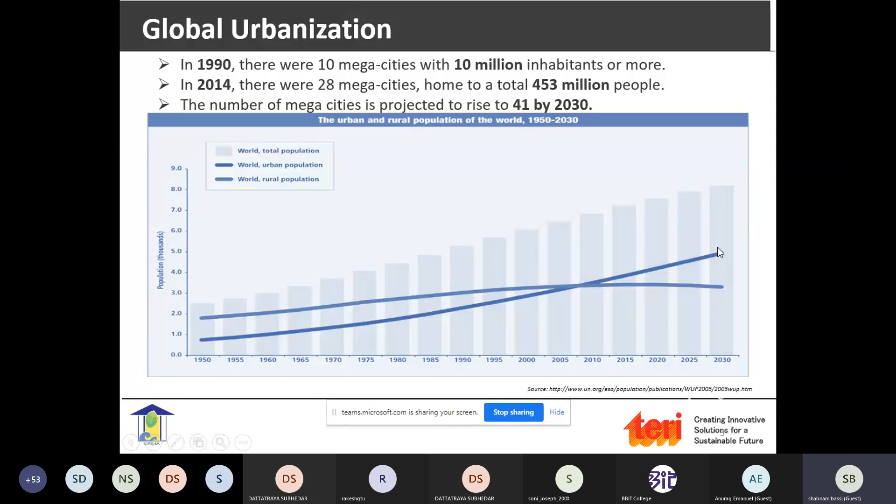More and more people are migrating to urban spaces, which indicates that since a lot of us are going to be migrating to urban spaces, we will need more housing. If it is going to be more housing, then there is going to be a lot of depletion of resources. Urban spaces will need more infrastructure, which will mean we need to know how to manage these resources in a better way.

So this is the population growth trend since 1950, and this is how we are growing exponentially.

There is a vision of the government of India, and there are various schemes, including the Smart City Mission, the Amrut Bharat, the Pradhan Mantri Awas Yojana, and the Swachh Bharat, which are all aligned to providing basic infrastructure, efficient urban spaces, and improved quality of life. In addition, they are creating lighthouses for replicable models which can be used in various cities of the country. So this is the vision in which the government is thinking, so that we can match the expectations of the upcoming urban spaces expected by the year 2050.

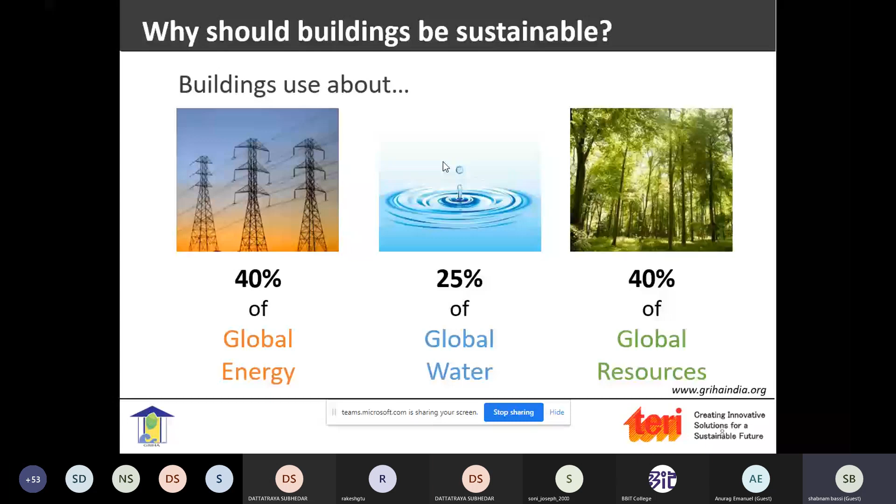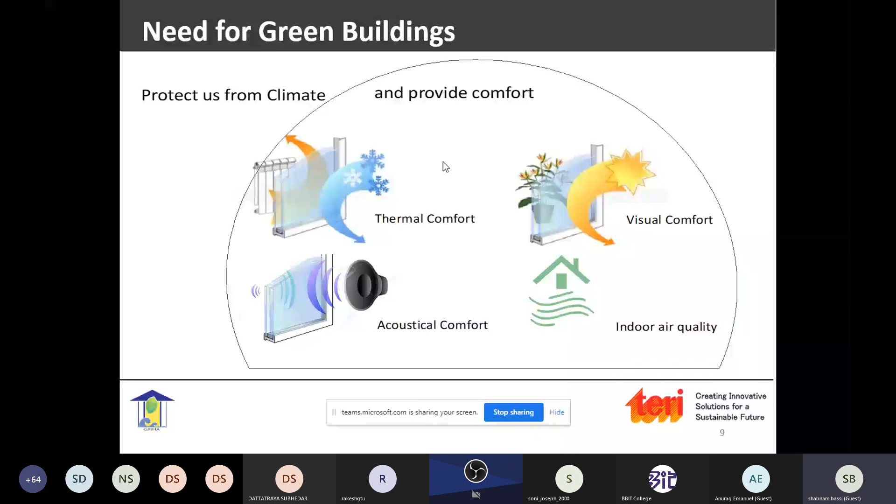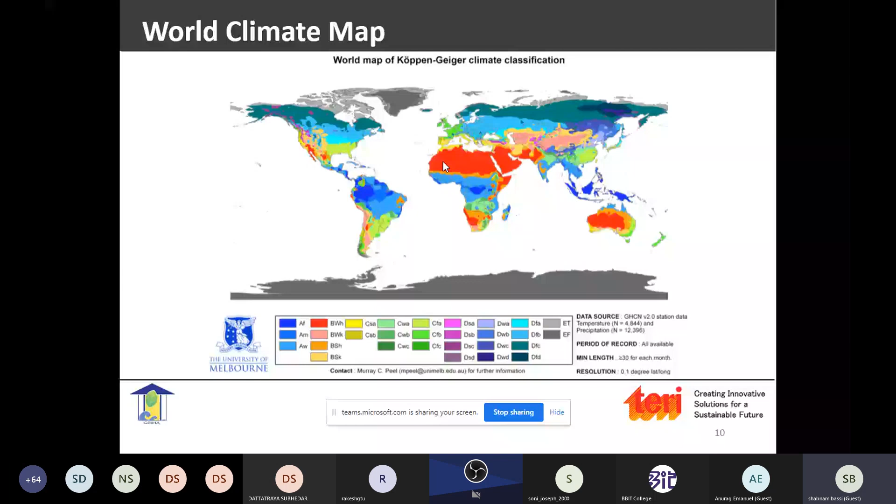I would have asked questions on this slide, but I have some limitations in terms of the interactions I can have with all of you. Just to give you a number, there are more than 28 climatic zones in the world, and each climate requires a different kind of construction, different ways in which buildings are constructed. Now, we all know that we fall under the tropical belt.

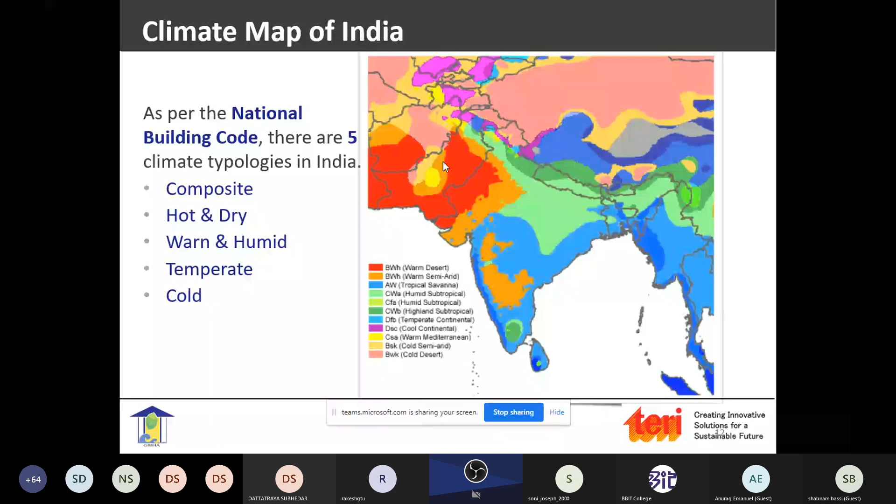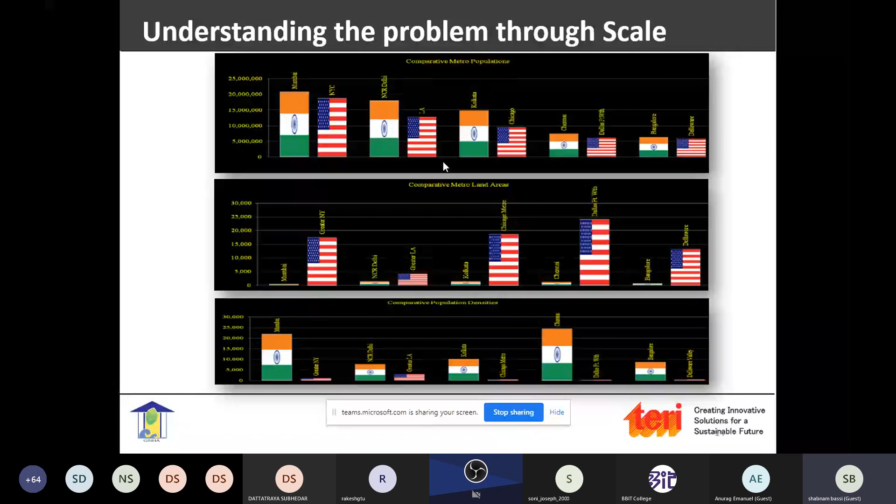So when we start comparing the kind of resources we have, the kind of land masses we have, it is not easy for us to compare ourselves with any part of the world, because we are quite limited in terms of the land space that is available to us. We don't have the luxury to construct buildings because the populations that we are looking at are quite large, and we have to design our projects in such a way that we are able to meet the requirements of all of us. So comparing ourselves is not acceptable, because that gives us a wrong image.

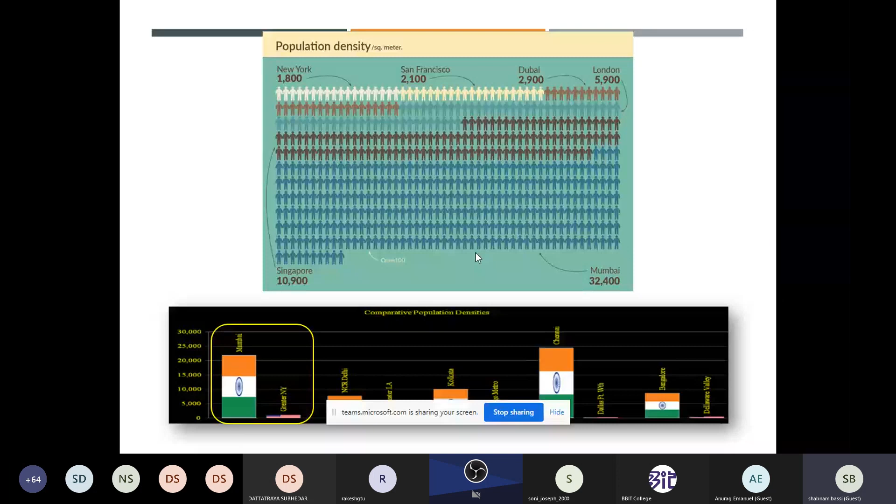Even in terms of variations in temperature, if we compare Mumbai to New York, the maximum temperature that we observe in Mumbai is 39.6. It also goes up to 42, 43 sometimes. Whereas New York is designed for -3, -2, and it reaches a maximum of 21, 20 degrees when there are peak heat gains. Similarly, Delhi compared to Los Angeles: the maximum temperatures in Delhi touch 50 degrees, 49 degrees a lot of times, and Los Angeles is not anywhere beyond 17 or 18 degrees.

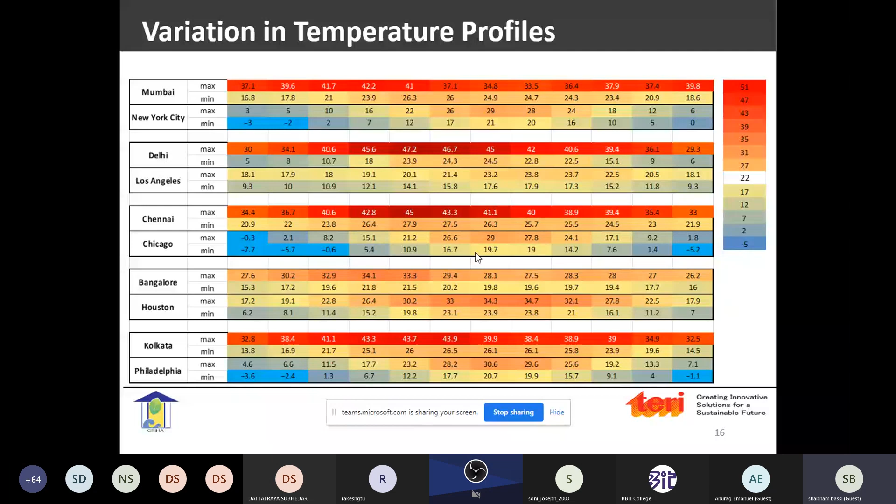So if I had asked you, you would have said that these buildings are not based in India, but in New York or some other place. But I would like to inform all of you that these buildings are based in India, and we have started aping buildings from the West. Now, when we talk about glass buildings, all the buildings that you see here, first of all, we don't know which city these buildings are designed for.

Secondly, the one major reason why we should not be designing such buildings is that we are using a lot of glass, and the basic property of glass is that it traps a lot of heat. Now, we just saw cities like Chicago or New York, where they have temperatures of -3, -4, or even -7 at some times of the year. Constructing a glass building in such cities makes sense, because when glass traps a lot of heat, it is able to keep that building warm for a lot of the day. So they don't require a lot of heating load, because their buildings will be thermally more comfortable with the trapped heat keeping them warmer.

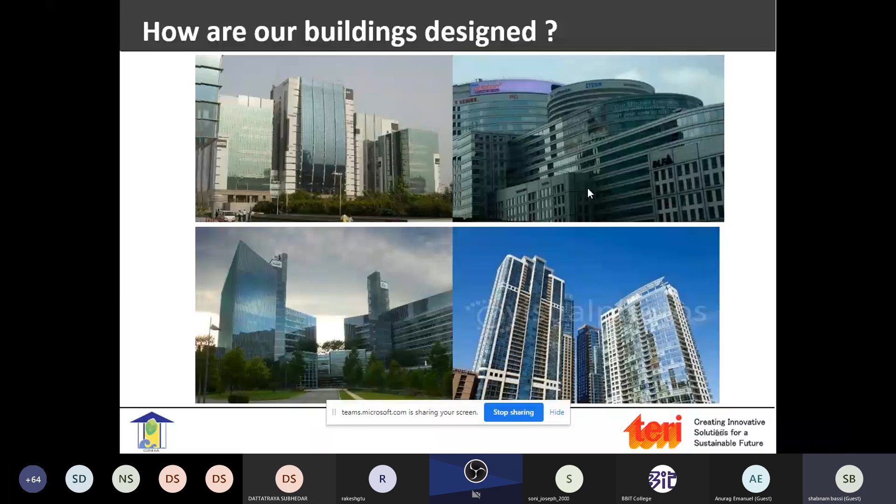So that is how the Energy Conservation Building Code came into being in the year 2007, when the Government of India, under the Ministry of Power, formulated these rules and regulations to ensure that the buildings of the future were designed keeping certain norms in mind and not just blindly copying designs from the West.

So, going a bit deeper into the design aspects or the climate conditions of the country, we all know that in the hot and dry climate condition of the country, we have high temperatures with low humidity and very less rainfall. It has intense solar radiation and generally clear sky, hot winds during the day and cold winds at night.

So I will not go into details of each climatic zone, but I'm just comparing this with another climatic zone, that is, let us compare it with a moderate temperature. Between a moderate temperature and a high temperature, the difference is that it will have moderate humidity and rainfall. The solar radiation will remain the same throughout the year, and the sky is generally clear. It will have high winds during summer, depending upon the topography.

But what we are trying to depict, by giving you a detail of the various climatic conditions of the country, is that the way we design a building for a hot and dry climatic zone will be very different from how we should design a building for warm and humid or composite or temperate. So it is very essential to know that if we are designing a building in the south, it will behave differently. Because the humidity levels are higher, maybe the air conditioning dependency will be more, or the kind of cooling required in a hot and dry condition will be water based cooling, and what we use in a humid climatic condition will not be water based cooling.

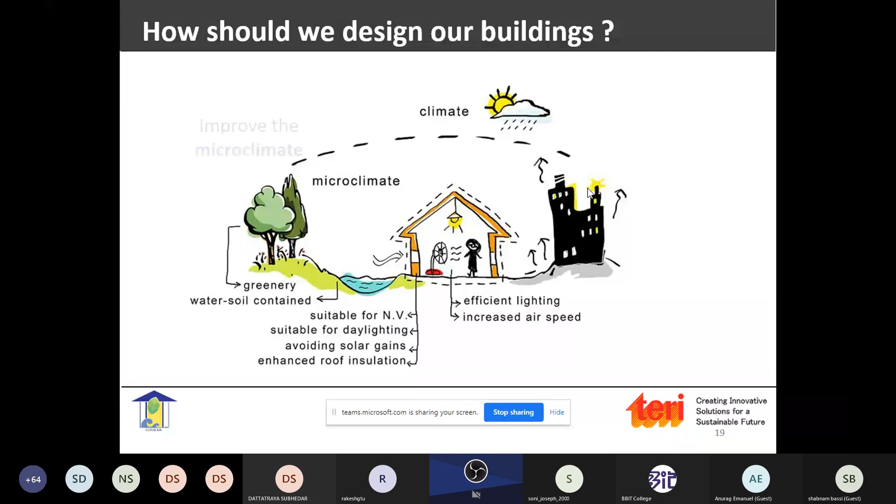Then we should design buildings in such a way that they're suitable for daylighting, avoiding solar gain, enhanced roof insulation, efficient lighting, increased airspeed. So these are the aspects that will help us improve the microclimate of that particular building. So basically, we'll have to minimize cooling and heating loads, improve the microclimate, and enhance the occupants' visual and thermal comfort.

Now, currently, the way we are designing buildings, we are giving very less importance to the design of a building, because people don't want to pay a lot of money to the designers, and they are spending a lot on marketing. So basically, this means that they are concentrating more on the aesthetics of the building.

Then, even in terms of constructions, it is observed that the kind of materials that are being used in a project are not of that quality, or do not have the sustainability aspects built into the materials. They are compromising on a lot of aspects in terms of materials, sustainability, and recyclability, and they want to construct a building at minimal cost.

So then what happens once the building is constructed? The repair works begin immediately after 4 or 5 years of occupancy of the project. So basically, your operations and maintenance costs go higher. Over the life of the project, we have seen in a lot of projects that the intention was to construct a building at a low cost, ensuring that we can save money on design and construction. But what we have observed is that money is basically not saved, but a lot of money gets wasted in the operations and maintenance of the projects.

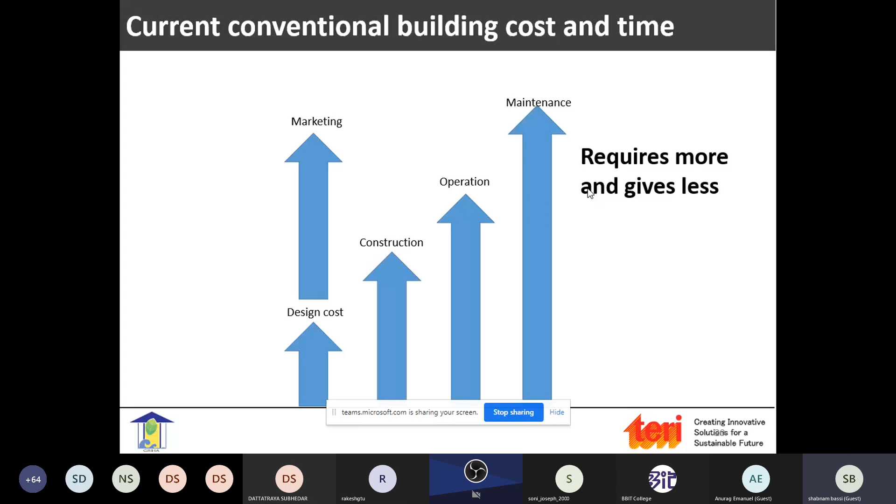On the contrary, if we are spending a good amount on designing a sustainable project which takes care of low impact and passive design features, in which we are also marketing it in such a way that people are aware of the green features of a project, and we are also aware of the kind of construction materials that go into constructing a green building, then what we have observed in our audits and surveys, with our own experience, is that the operation and maintenance costs are minimal.

So when we buy a project or occupy a commercial or a residential space, we as users should ensure that we are aware of all these aspects, and not only go by the first cost and think, oh, I'm getting it at a very cheap cost, so it is affordable to me. You should also try and understand how the design is, what kind of materials are being used in the building, and whether this building will give me the right kind of comforts that I'm expecting. You have to go into the details of the documents submitted by the builder or the person selling you the project, to understand what kind of efforts were made in designing that project.

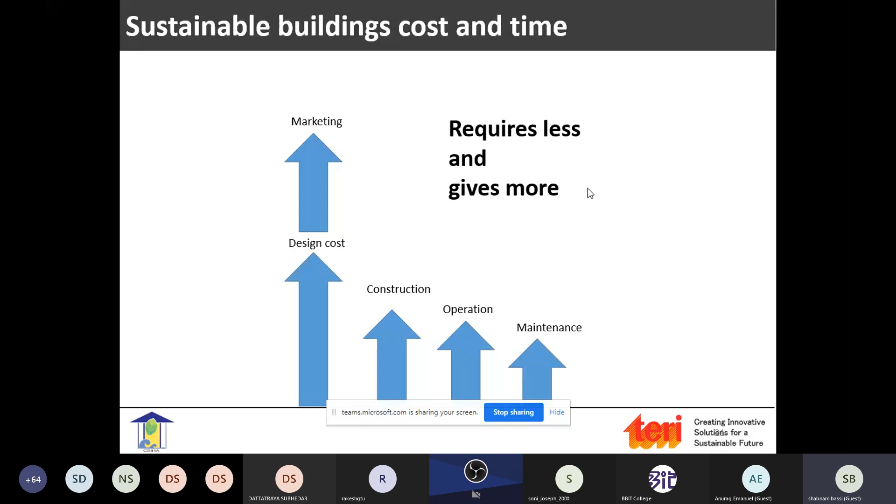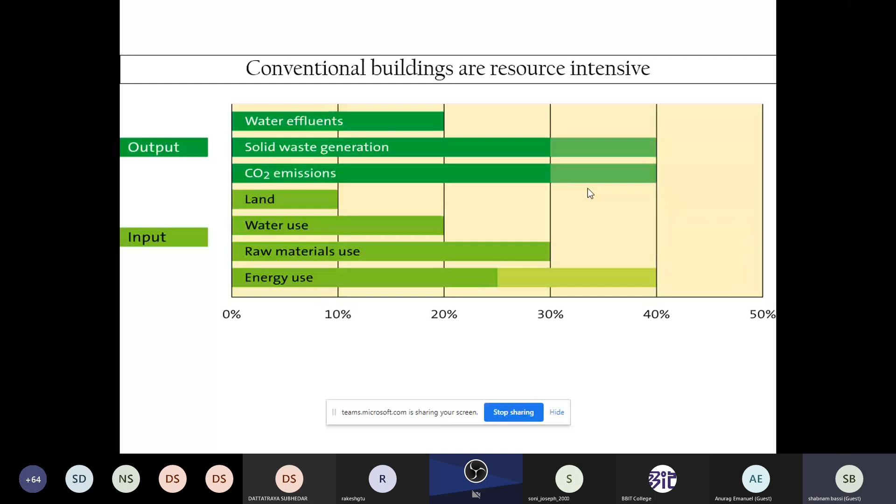So we have to understand how conventional buildings are designed, and why we are encouraging more people to go towards efficient houses or green buildings, because conventional buildings are resource intensive. In terms of land, water, raw materials, and energy, they use a very high percentage. The percentage graph is shown below. And in terms of emissions, the CO2 emissions are high, the solid waste generation is high, and the water effluents are very high. So in today's world, when resources are depleting at a very fast pace, there is no point in investing in conventional buildings.

So this is to give you, in a nutshell, the various features of a green building. An efficient or green building makes efficient use of energy, water, and other resources. They make extensive use of renewable energy such as solar. A green building has pollution and waste reduction measures, and enables the reuse and recycling of waste. A green building no doubt has very good indoor air quality. The materials used are non-toxic and sustainable in nature. The design of the building is such that the environmental conditions are taken care of.

Now, we have seen in a lot of projects, especially commercial projects, that when a developer buys a patch of land, he tries to clear the entire land and starts constructing on a fresh patch.

But what we as green experts promote is that we should try and do minimum destruction of the environment and try and preserve as many trees and greenery as we can, or in fact the natural resources, like if there are any water bodies, or the natural growing big trees that are there. If we can naturally preserve them, that is the best case to construct green buildings, because it is always healthy to be living as close as possible to the environment. So this is what we mean by a good design.

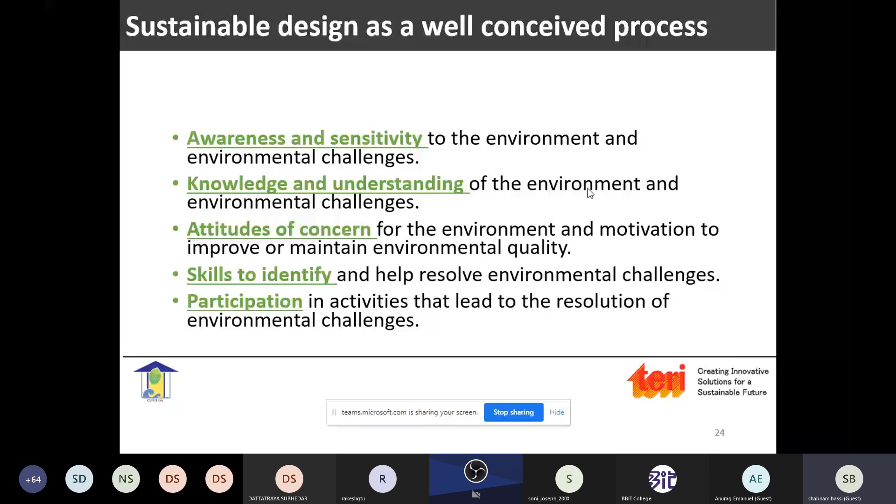If we have greater awareness and sensitivity, knowledge and understanding, attitude and concern, skills to identify, and we are participative and we lead from the front, and we are completely involved in a process, we will be able to do justice to the project. Use as little resources as we can, move away from the linear take, make and waste model, rather be on the circular path, and work on a circular economy, in which the concept of waste is eliminated, because every waste product is a raw material or a nutrient for another industry.

So we are always promoting this, that we cannot make a project and start dumping waste at a new site, because ultimately that new site will also be occupied by somebody else. So if we start using the same material within our project, it will not only be sustainable but will also be economically viable to all of us. Live off nature's interest, not its capital. Use nature's resources only at the rate they can self-regenerate.

So this is a very, very important aspect, that nature has given us a few things as a gift, and it is not something that we have inherited from somewhere. So it becomes our responsibility, and equally we are responsible for the kind of climate change events that are happening, be it floods, be it cyclones, be it landslides, all these aspects.

We as humans are completely responsible for it, and we should take the responsibility for it and ensure that such destructions, if not stopped, in future will harm us in a way that we will never be able to recover from. We should imbibe ideas of sustainable forestry, fishing and agriculture in such a way that we are giving something back to the society.

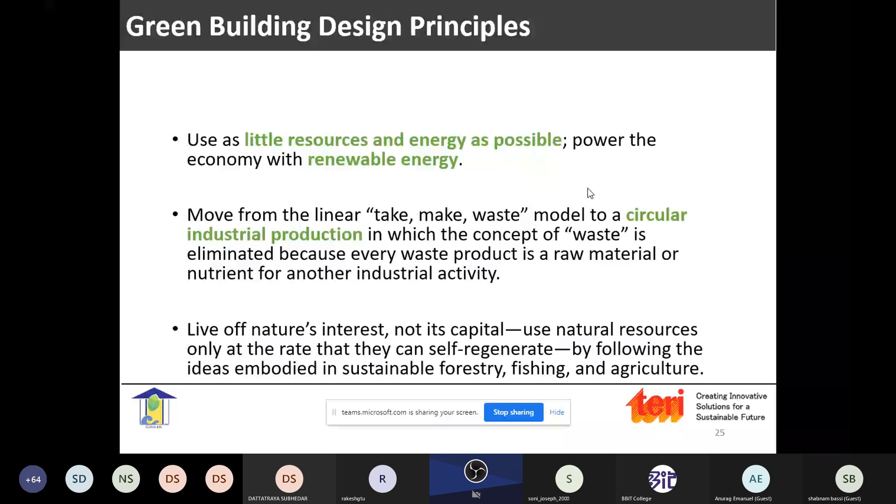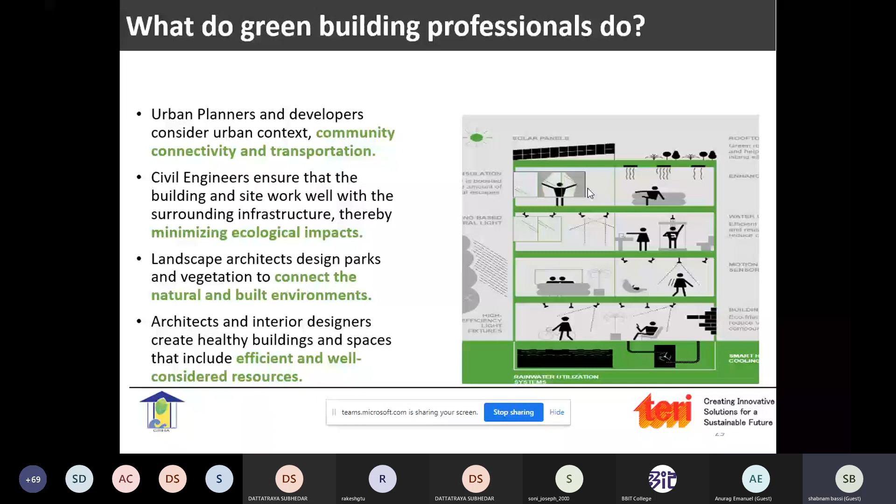So this is a very, very important aspect to understand in a building, that even if I do a good design, my design will fail if my civil engineer or the architect hasn't implemented it in the way I had designed it. So then my design has failed. If my facility manager has not maintained my building the way it was constructed, even then my design has failed.

So when we construct a green building, or when we are understanding the various concepts of green building, it is important that all of them understand the importance of constructing a green building, and then they work together. So this word that I'm using, that we have to work together, or work in a way that it enhances the other professionals' work, is the important link between success and failure, because a good design is successful only when it is implemented with the right honesty in the project.

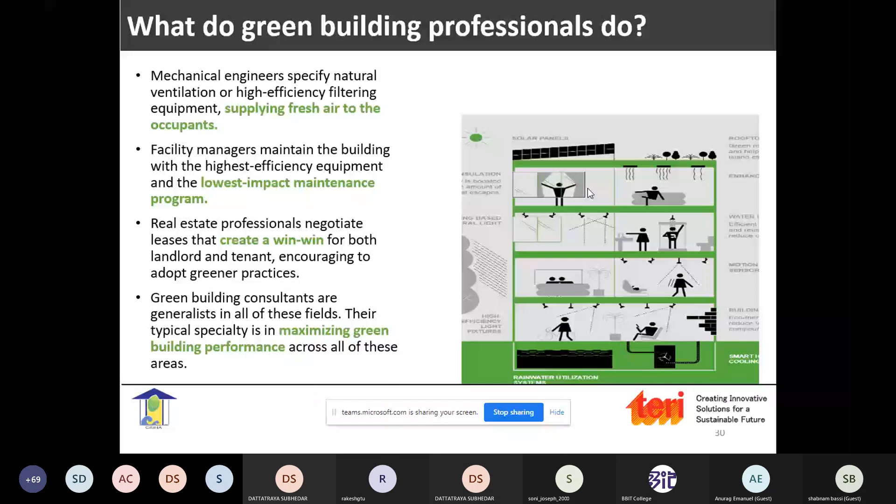So each state, the buildings are governed at the state level. So each state has its own policy to govern the buildings that they want to. So different cities will have different policies. So a policy that may be existing in Haryana may be very different from the way it is implemented in Maharashtra. And vice versa, policies that are in Uttar Pradesh will be very different from what is there in Bangalore. So each state has its way of judging what will work in their state, and they take out certain regulations and give benefits to the end user.

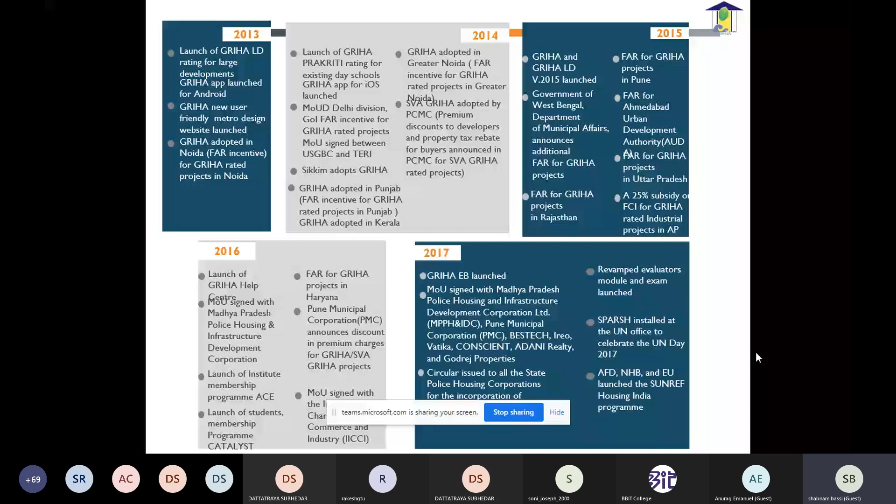And the list continues. What we're trying to explain is that the list is indefinite, but the intention is to have more and more people engaged in this journey, so that we have more projects coming up in future.

As a contribution to the ratings, we are supposed to report emissions on a global scale. Under the Intended Nationally Determined Contributions, India has recognized only GRIHA as the rating which will report its emissions through ratings.

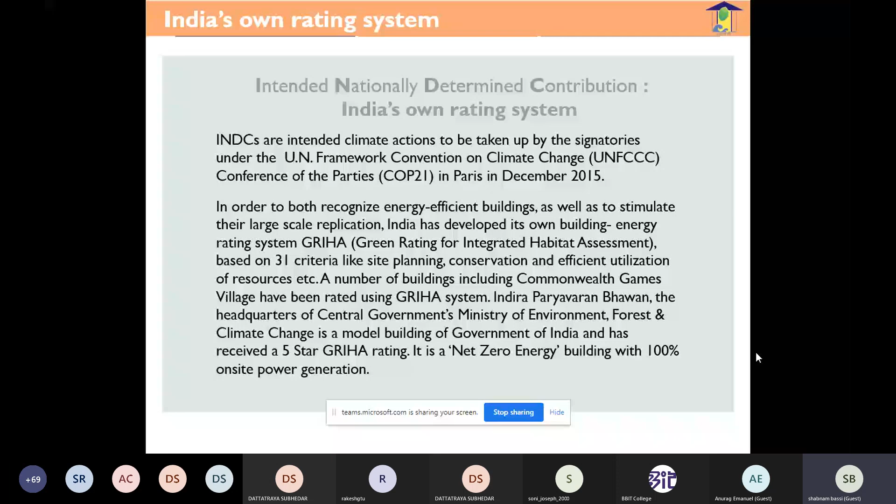So these are all the kinds of ratings we have. For built-up areas greater than 2500 square meters, we have GRIHA. For smaller categories, we have SVAGRIHA. For very large projects, we have the LD ratings. Then we have the affordable housing category, based on PMAY guidelines. We also have a city level rating, which is a handbook to understand how cities should perform in terms of sustainability.

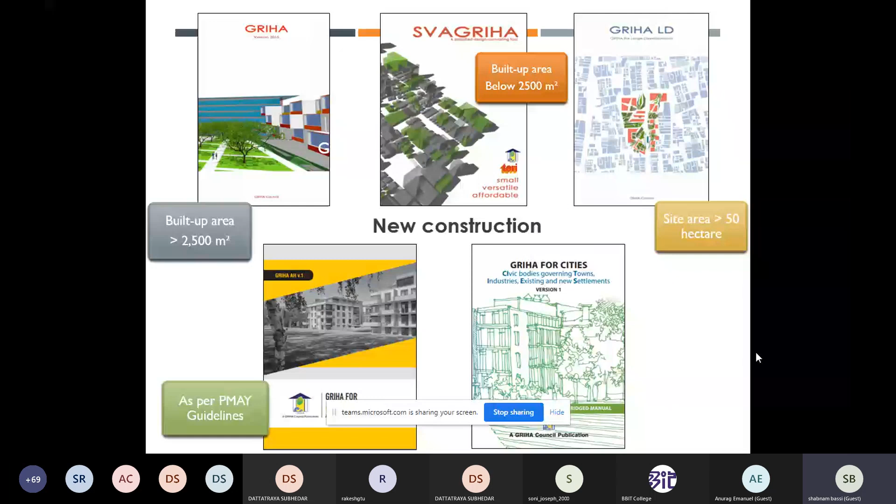We have a very innovative existing buildings category of ratings for school children, where we teach them how to calculate emissions for their own school. They do small calculations of energy, emissions, and carbon footprint, and any student aged 12 to 14 can do these simple calculations. This is the best age to teach children sustainability concepts, because this is what they carry home and into their lives. And since they do it themselves, it makes it more acceptable.

The key features of what we do is it's a context-based rating system. There are a lot of non-applicability clauses for places where certain things don't make sense, like if water tables are already higher in certain places, we don't encourage you to store water through rainwater harvesting.

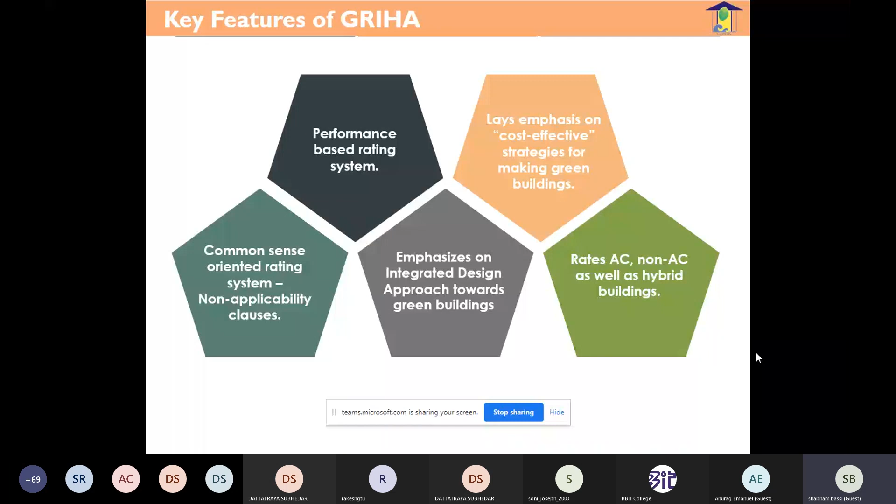Similarly, it's a performance-based rating system. We have so many experts working to construct a green building, so there's a lot of emphasis on an integrated design approach, where all the experts need to come together and understand the aspects in totality. It rates air conditioned, non-air conditioned, as well as hybrid projects, and lays emphasis on cost-effective strategies and use of local materials.

These are all the sections listed in our rating: site planning, construction management, energy, comfort, well-being, solid waste management, sustainable materials, socioeconomic strategies, etc. Point-wise weightages are listed here. Most of the weightage goes to water and energy, 20% to energy and 17% to water. It's a 100-point weightage system, where maximum points are given to energy and water.

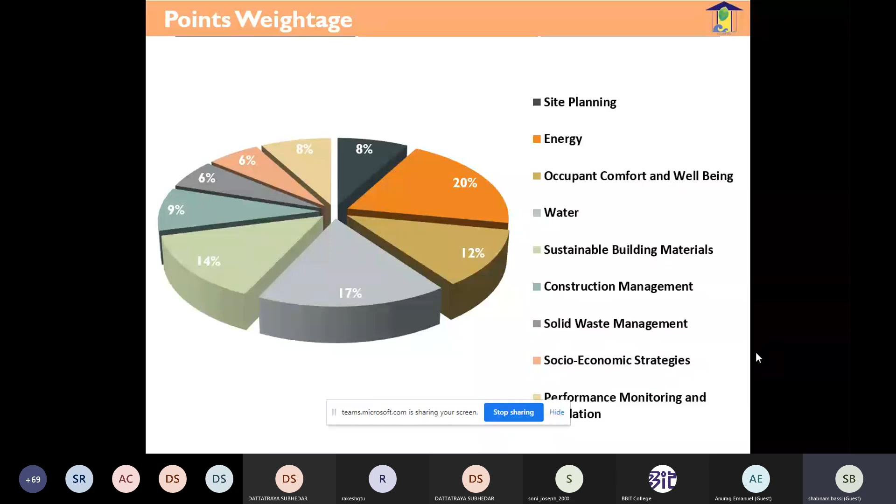The rating process is quite simple. Once you register a project with us, we immediately conduct an orientation workshop. This workshop is extremely important because we as GRIHA members go on your site and conduct it, not only teaching but making you aware. It includes your structural engineers, civil engineers, mechanical engineers, architects, designers, and interior people. They all must be present to ensure they understand the process in totality and work in their own zones to reach that common goal.

Then we conduct a lot of site visits. The first is done before the start of the project to ensure all construction practices are in place. Then we check that building compliances are met when installations are happening. After documents are submitted, a final site visit checks if systems and equipment are installed properly. Then it's assessed by a third party to ensure complete transparency in our process.

Then we get a final provisional rating. The final rating of the project is awarded only once the project is one year operational, to see if it's also performing the way it committed. These are the various point-wise weightages - you get a 1-star rating if you score between 25 to 40 points, and if you get more than 86 points, you get a 5-star.

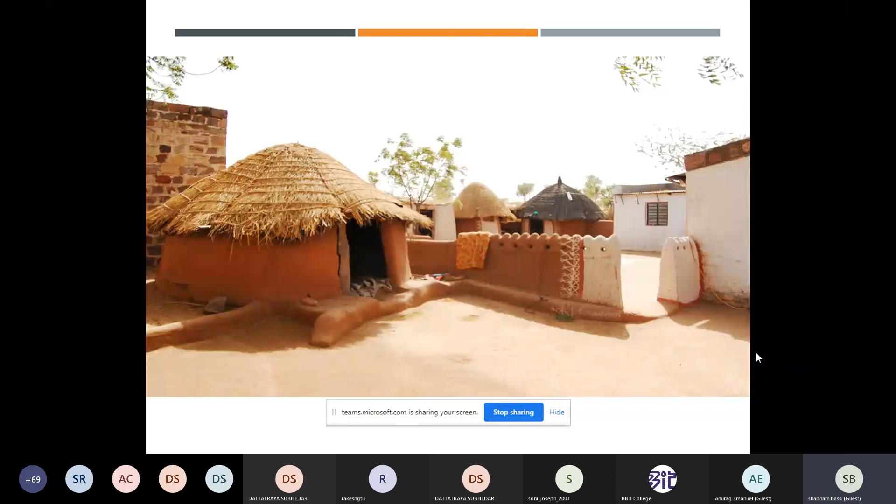So why do we need to talk about green? These were the kind of buildings we were constructing. I would like to answer on your behalf that if such a building was constructed in a hot and dry area, mud would have the basic property of keeping the building cooler from inside, and the thatched roof would also help keep the building cooler.

The style of architecture of Rajasthan is very different from the way a building may have come up in the South, or in any other part of the country.

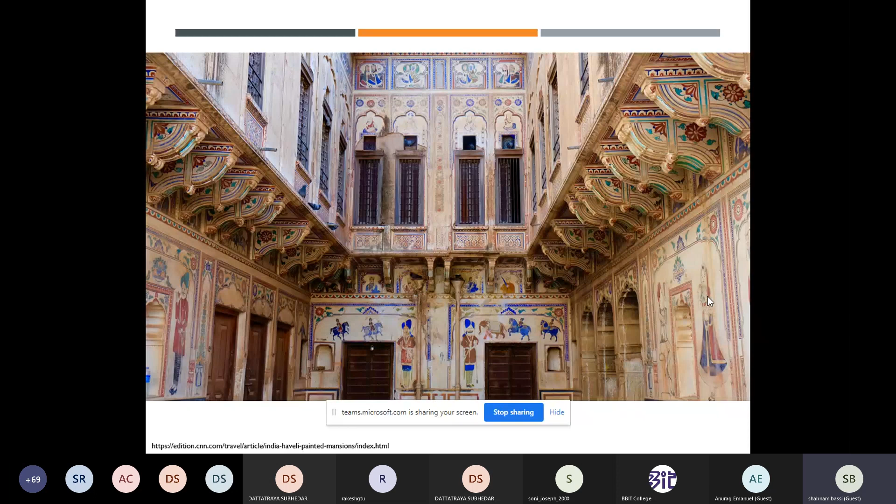There's urgent action required, definitely, for green buildings. If we start taking these concepts seriously, we will have minimal impact on the site and surroundings. We don't need to damage the surroundings just by constructing one project.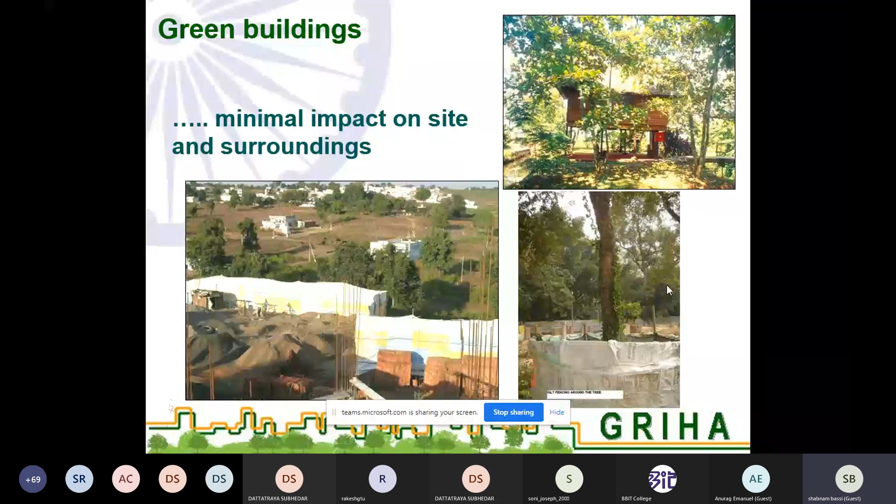By constructing green buildings, we become energy efficient and maximize use of renewable energy. Green buildings basically use less water, recycle water, and reuse water. Water is depleting at a very fast pace, and we need to become really serious about it.

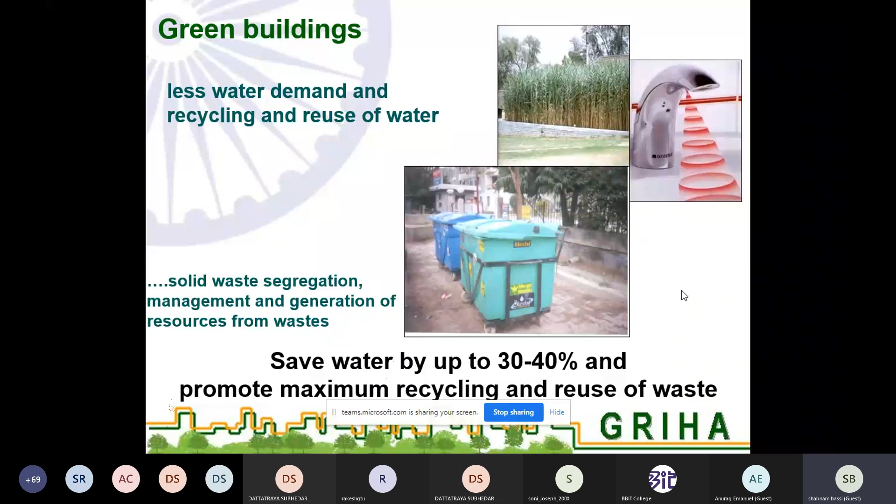Waste is becoming another matter of concern. Solid waste segregation is happening in a lot of places, but eventually it is going and getting dumped at one place. There is no point in segregation if we are not using it for the purpose it is intended. We need to ensure that end-to-end waste management happens the way it is intended. We save nearly 30 to 40% of water if we are able to recycle and reuse it.

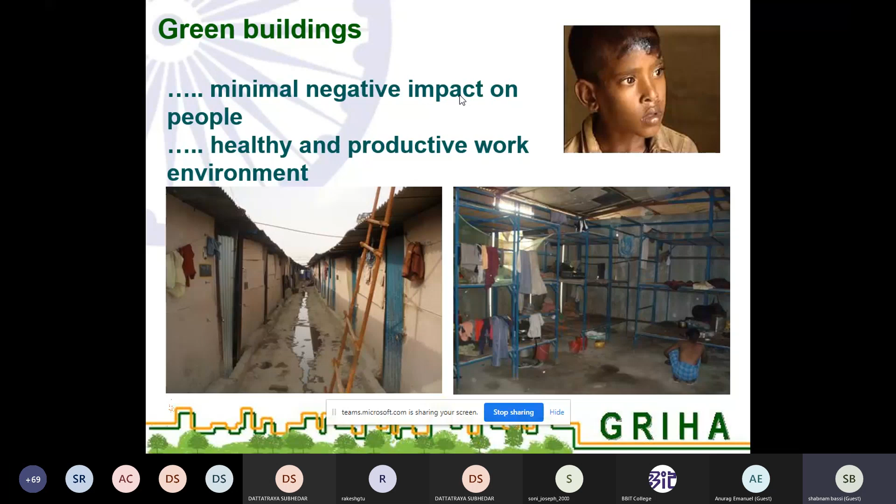General well-being - we never bother about the well-being of construction workers and the productivity of people on site. GRIHA is the only rating which has built in the social aspects of well-being of health workers. It basically has minimal impact on the people's health and productivity in the working environment. Green building design calls for an integrated and coordinated design approach in planning, design, construction and management.

There is a difference between an energy efficient building and a green building. An energy efficient building will only conserve energy, but a green building will conserve energy, water, landscape, waste generation, adoption of recycled and reused material, as well as use of low energy materials.

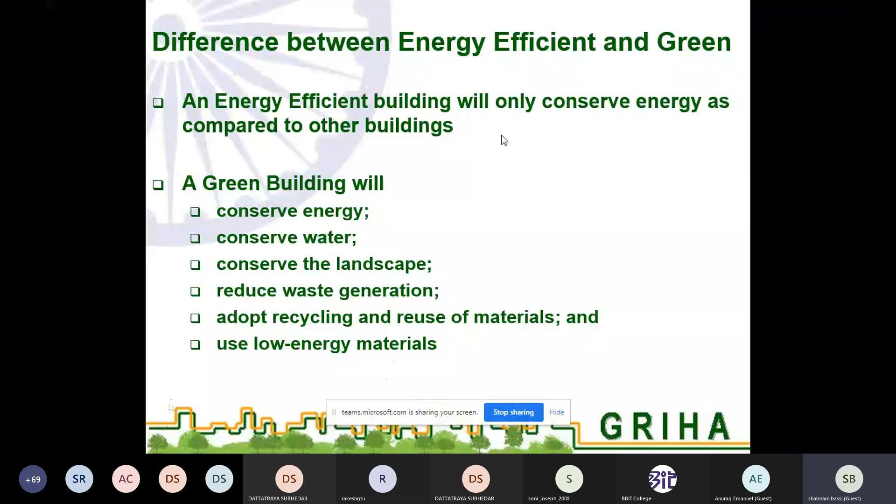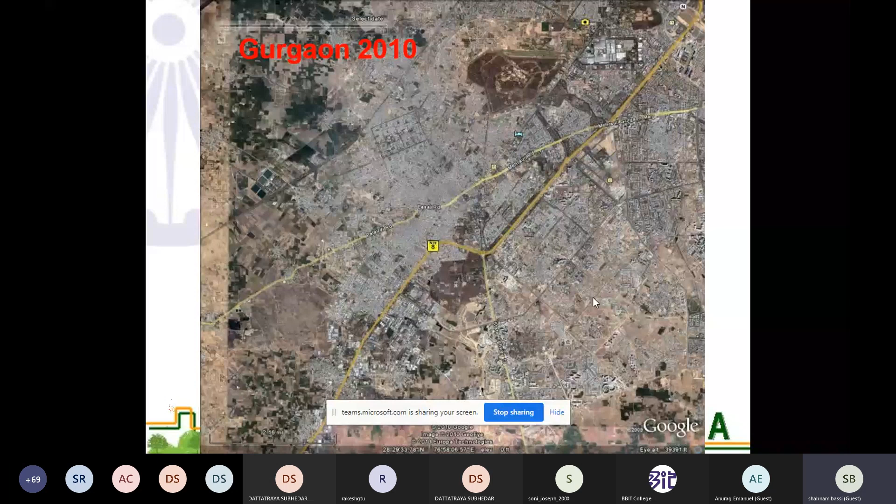Why do we need green buildings? This is quite indicative - in 2010 this much land was green, but now the entire patch has become like a concrete jungle. As we expand in urban spaces, there are hardly any green spaces left, and if we don't use these resources judiciously, this scenario will become common everywhere, with forest and agricultural land being wiped out.

Water and waste are prevailing urban challenges. Water availability is decreasing by 15% per capita by 2020. Only 26% of estimated domestic wastewater is getting treated, and nearly 42 million metric tons of solid waste is generated every day in urban spaces. This is the kind of waste and water we are using, and this is what we are left with.

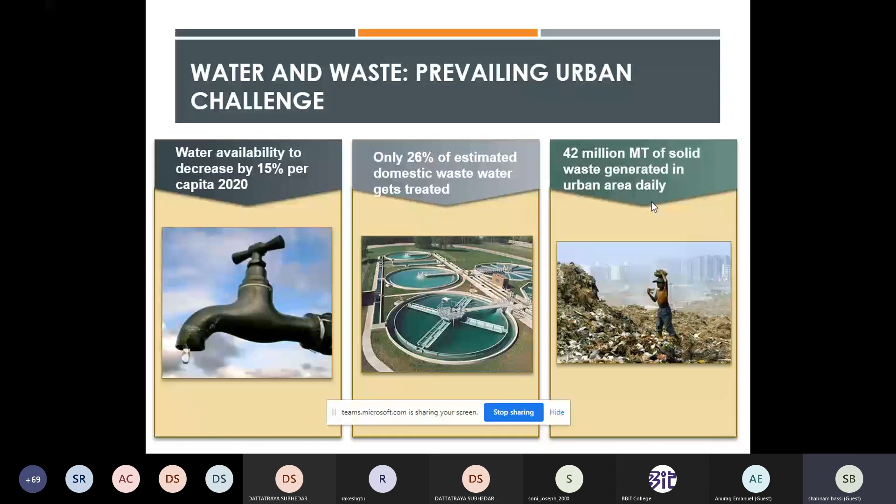We have certain rules or regulations already in place. I've already mentioned ECBC. The National Building Code 2016, Volume 2, has added a chapter on sustainability.

What is required in a rating? Mandatory. It is important to comply with all the aspects of the building codes that I just mentioned about ECBC. So that is, of course, the minimum benchmark that you all have to perform in order to get a rating. So going beyond the minimum benchmarks is something that ratings are promoting, that we have to do something beyond the already laid benchmarks of ECBC.

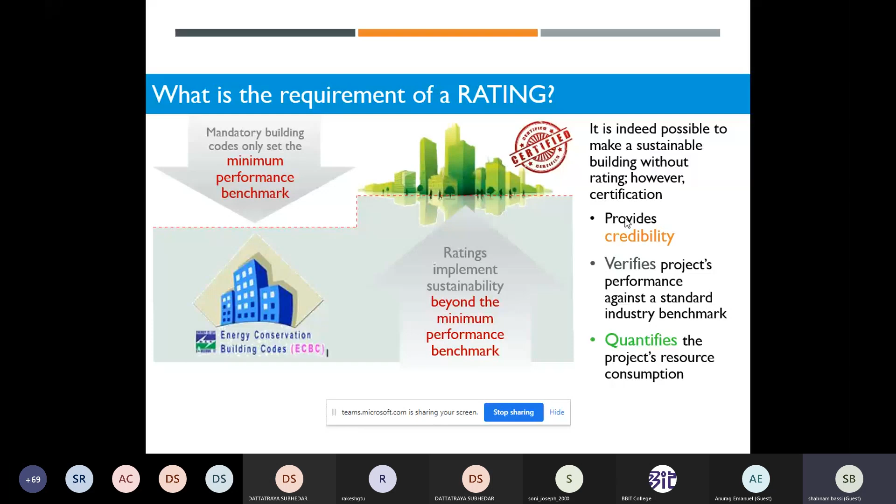It is possible to make a sustainable building without rating, but what a rating body does is that if I construct a building for myself and I say I'm satisfied, I made a green building, then there is no claim to fame. So basically we come in as a rating body. We not only rate your project, we provide you credibility, we verify your project, and in quantifiable terms we tell you how much resources you have used. So you have an authentic source of getting information from us.

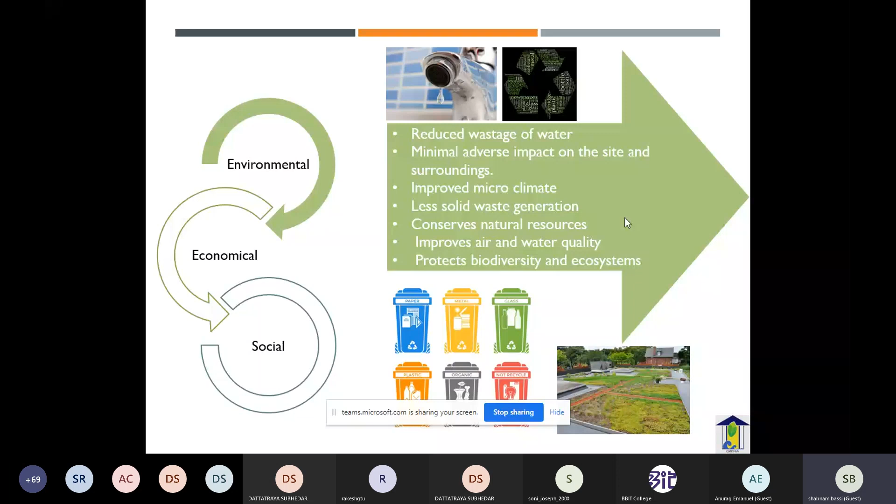So green buildings are basically environmentally responsible and resource efficient projects. This is, in a nutshell, a definition of a green project. Reduce waste of water, minimal adverse effect on site, improve microclimate, less solid waste generation, conserve natural resources. So all these aspects are part of the environmental, economical, and social benefits that I just explained.

Reduced operation cost, improved occupant productivity, create market for green products, less energy bills, improve quality of life, minimum strain on local infrastructure, because if you are reusing water inside and if you are able to harvest your own energy, then you will have minimal loading on the local infrastructure, and this will indirectly also improve your health and comfort.

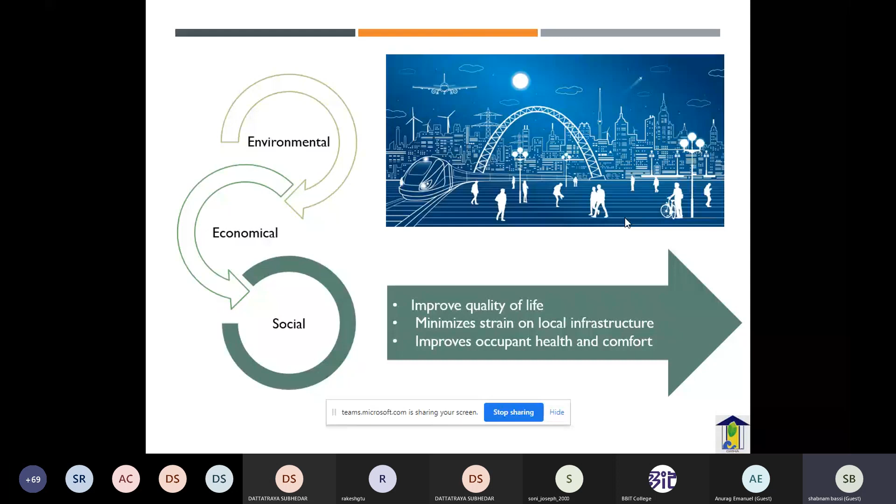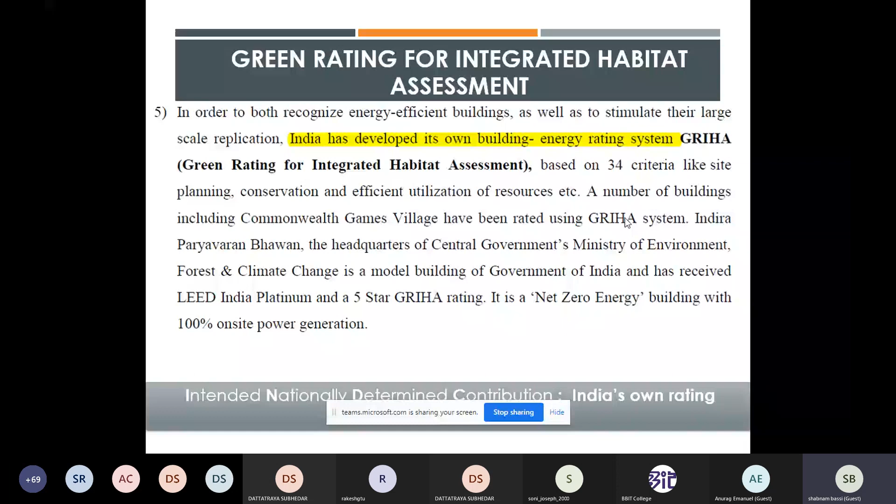Now we all are living with this myth that green buildings cost more. But what I would like to emphasize is that if you are able to reduce the energy demand of your building by designing a good building, so basically your architects will play a very important role in designing a project, then that will reduce the demand for energy by using passive features. And there are a lot of passive features that can be incorporated, like light shelves, or using the natural bodies, using your trees around you. These are all the passive features that can be taken care of when we are designing a green building. Then your building is least cost impact. It will not have any impact on the cost of the building.

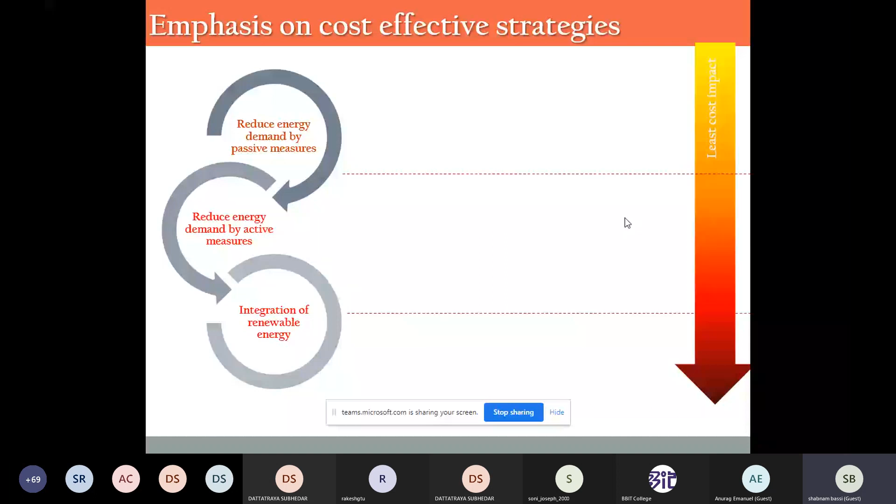That's what I just said, that it has to be climate responsive, energy efficient envelope, daylight harvesting, integration of natural resources for cooling and heating of a building. So basically, the way you are putting up your windows, if there is enough cross ventilation happening in your building, then you will have very, very less dependency on your artificial systems. So then your buildings will never cost more.

But if you have failed to design a good project, the next option that becomes a savior for your project is to use energy efficient equipment. Basically, there are energy efficient labels available for major equipment available in the market. So necessarily the high-end consuming equipment, that is air conditioners, fans and lights, you should use labeled products only. Apart from that, for energy efficient operations and maintenance, you should use BMS systems, the building management systems, which help you to track the progress of your project.

So this will have some impact in terms of cost, because when you buy energy efficient equipment, it will be slightly higher than a conventional product, but you will be able to recover this cost in a span of 5 to 6 years. But the initial cost will be slightly higher.

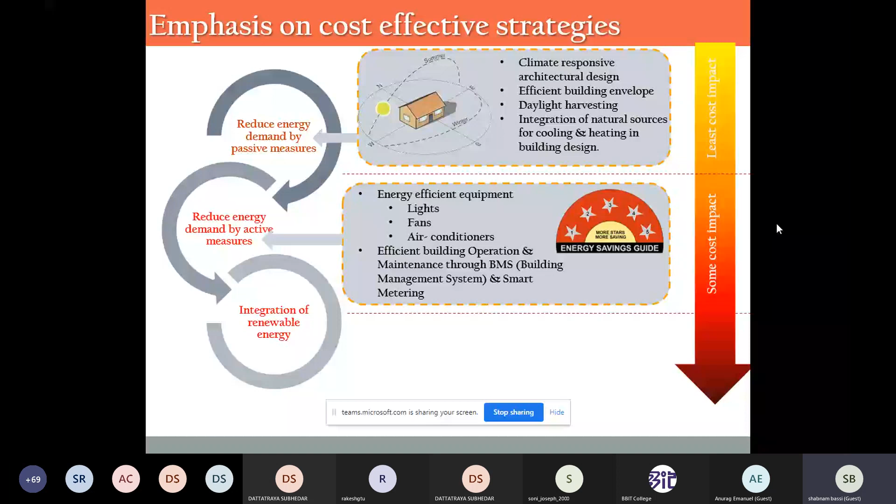But if you have failed in the first two steps, that you could not do a good design, you could not put in even the good equipment, then what happens is, when the building is now getting occupied, you get a mandate, just go and get my building a green certification. Then the last option that you are left with is only and only to offset energy demand by renewables. Now, although renewables is the most efficient way to conserve energy, this is not the best way to do it, because ideally you should have followed the path of good design, equipment, and then reached here.

But what people do is, they forget about the design, they don't want to do anything for equipment, and then they straight away want to just put in solar panels on the rooftop. So this sometimes works, but it is a highly cost-intensive strategy, and the time taken to recover this cost is very high. It may be beyond 10 to 15 years sometimes if the project sizes are large.

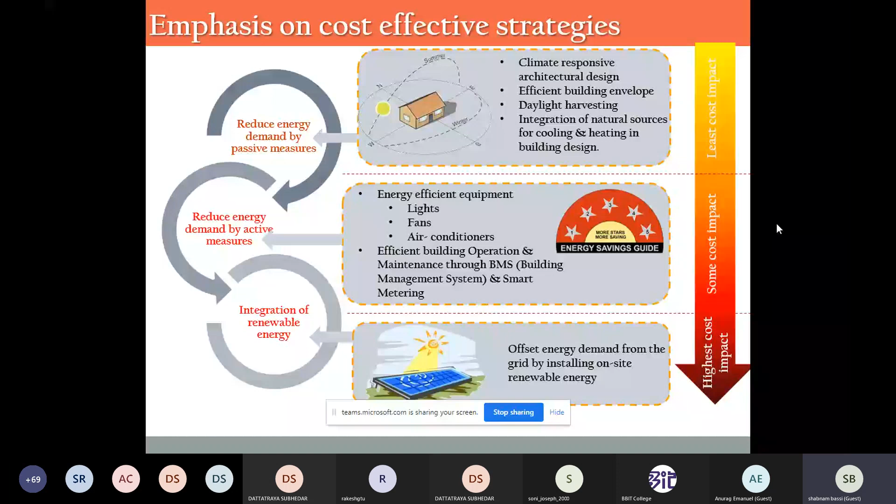Similarly, for water: optimizing water demand, then using efficient systems, and then last of all, we should invest in a rainwater harvesting system. First of all, what we should always look at is how we should optimize. The demand for the project should be made in such a way that your project does not require a lot of water. If you are using a lot of green grass in your project and a lot of water is getting wasted only on landscaping, then we cannot do much about it.

But then you can use low flow fixtures and efficient water systems in your project. And if you have not been able to achieve the first two steps, the only option you are left with is to start using rainwater harvesting systems. The technology is not new, but the cost of implementation is very high and the recovery time will be much higher. So as we have always been suggesting, you should invest in designing. The design of any project, be it architectural or in terms of your systems, should happen at the right time. Only then will it make sense to do a green project.

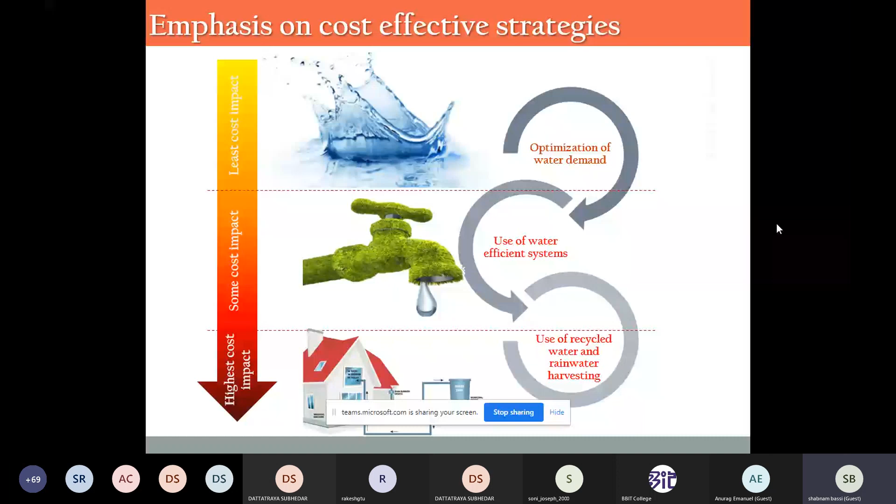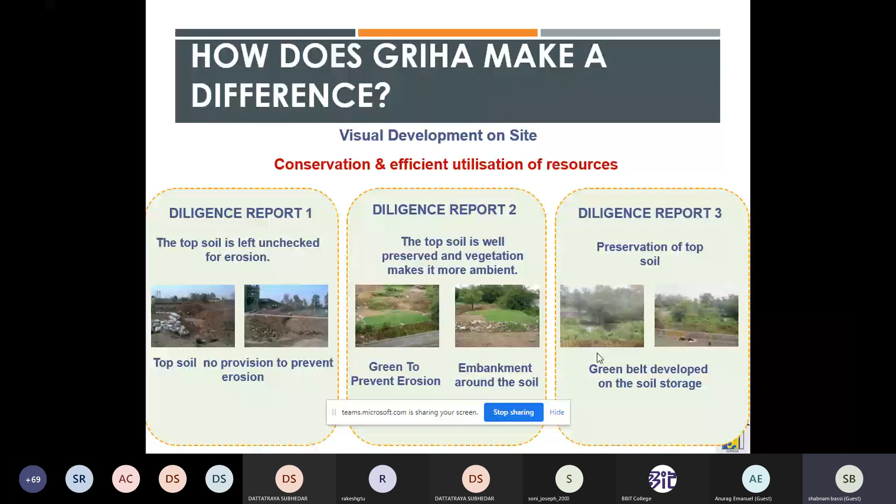Similarly, we have seen in other aspects the way the materials were maintained, how the water tanks and wheel washing facilities were added, barricading was done, and this all happened after we visited and suggested ways to reduce the losses on the site. They incorporated those things and were successfully able to not only reduce wastage but do less damage to the environment.

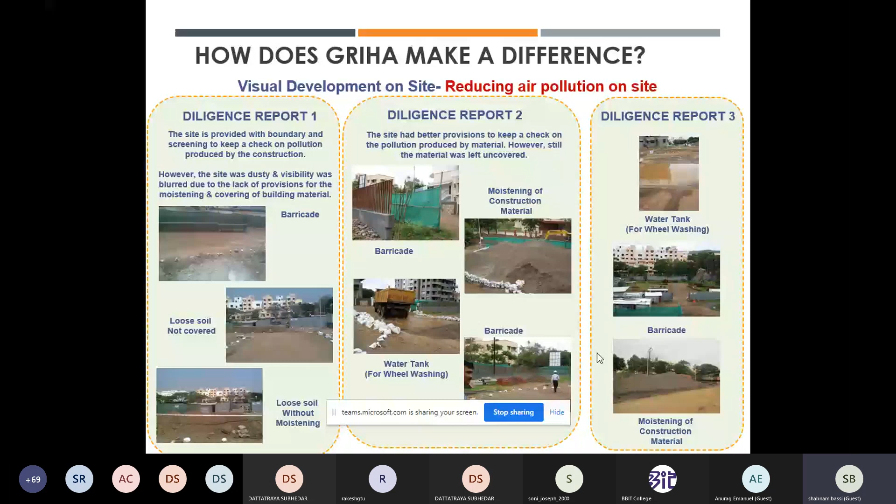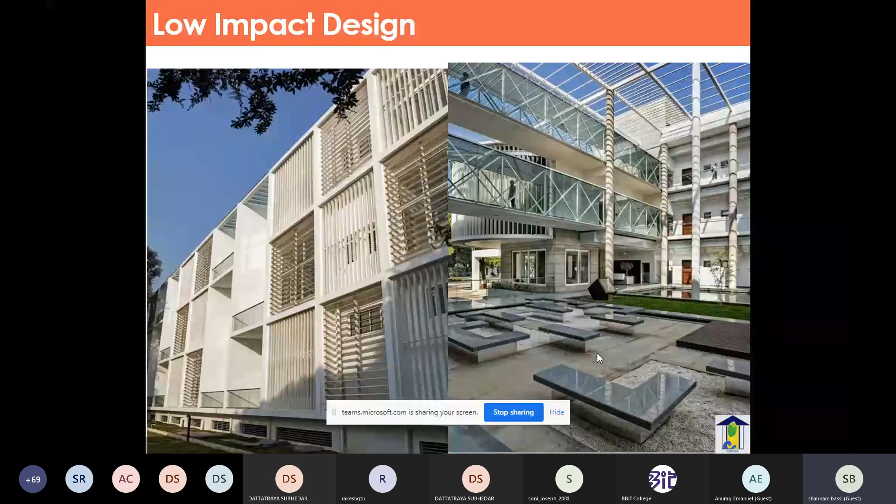So these are a few examples to show how low impact designs can help you not only aesthetically make the building look richer, but also improve the climate inside the project. Very, very cheap techniques to ensure that the rainwater is getting harvested. There is no wastage; at least the rainwater gets preserved. Simple rock bedding is provided to ensure that if there are any rains, the water gets conserved.

We just talked about the urban heat island effect. I was mentioning preserving the local trees. The building on your right over here is an IIT campus. They have preserved the local trees, and not only are they improving the microclimate of the project, but as you can clearly see, they are also providing natural shading to each building. So it looks like these buildings are living very close to nature.

Similarly, the project to your left has developed basically the contours where greenery is maintained. Your green covers have been maintained in such a way that the microclimate is improved.

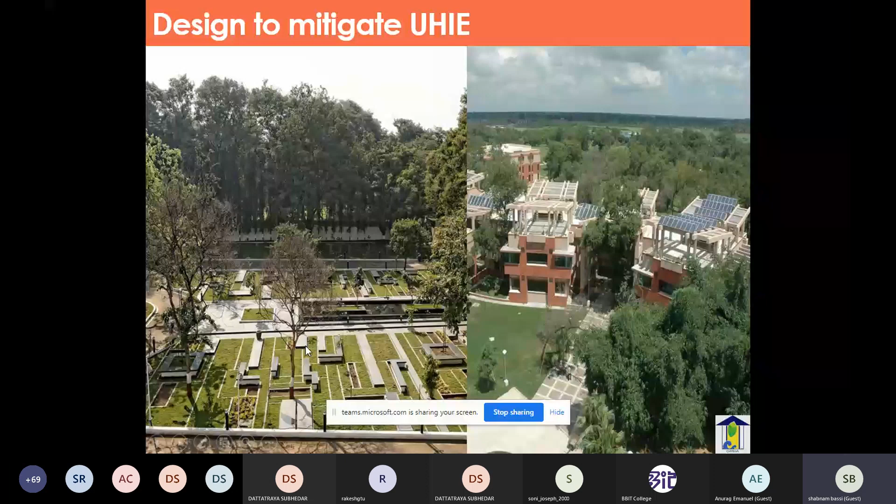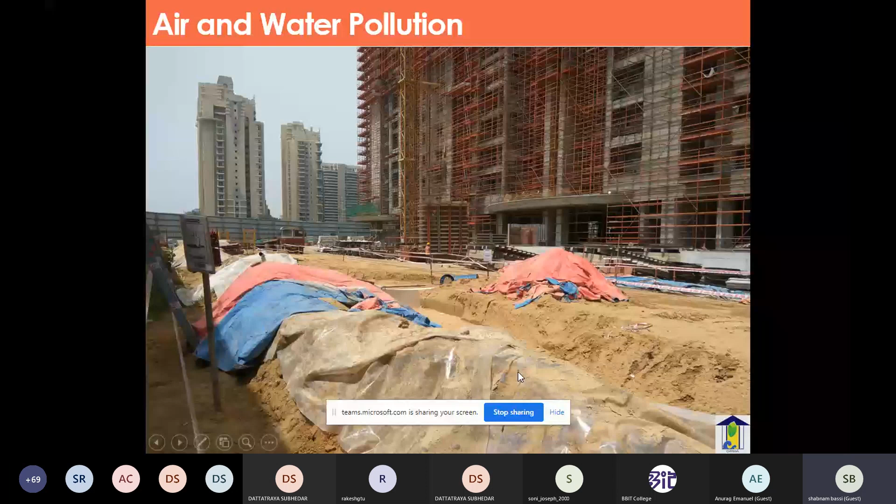So these are a few visuals of the air and water pollution, how people have shown interest in having good site management practices. They have different storage compartments for cements, fuels, and other wastages that were saved just by doing demarcations of the materials. You can clearly see that the material was covered and not left for it to just wash off with rains. Proper barricading to ensure that there is no air pollution to the nearby site.

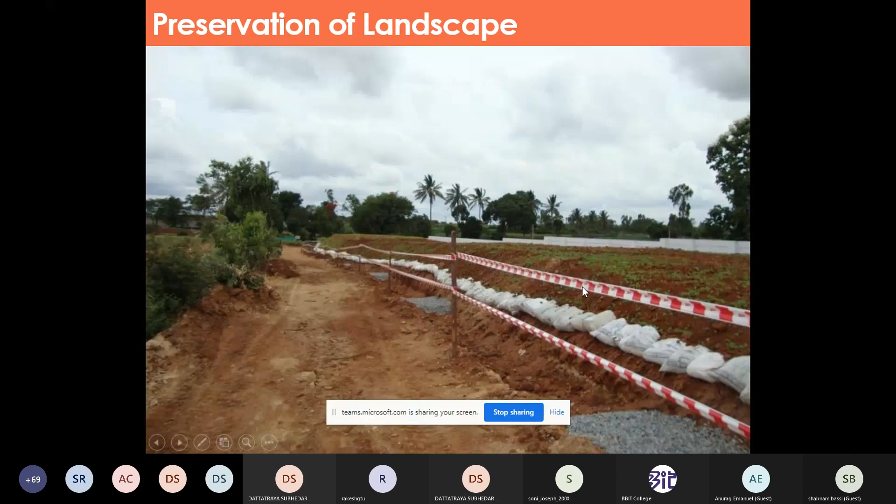The topsoil is being preserved by gunny bags, and they have also planted temporary green grass to ensure that the topsoil doesn't run off. The trees are preserved, and we are not stacking any materials under them, and we are barricading this tree to ensure that this tree can be used in future.

This is a clear example to show how materials can also be safely kept on a site in a proper way, and not kept in a way that it gets not only wasted, but also gets damaged by environmental conditions.

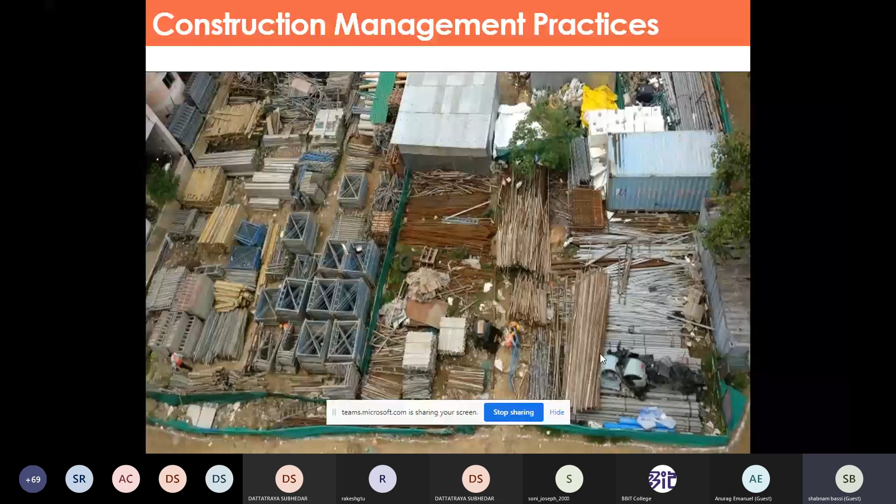Various ways of achieving occupant comfort and well-being is to reduce the window to wall ratio. Amount of glass that can be used in a project is basically a definition that is addressed here, that is window to wall ratio, skylight to roof ratio, solar heat gain coefficient, ensuring good daylight inside a project, optimal artificial lighting in a project, optimal thermal comforts, optimal acoustic comforts, and low VOC paints are all aspects which lead to occupant comfort and well-being.

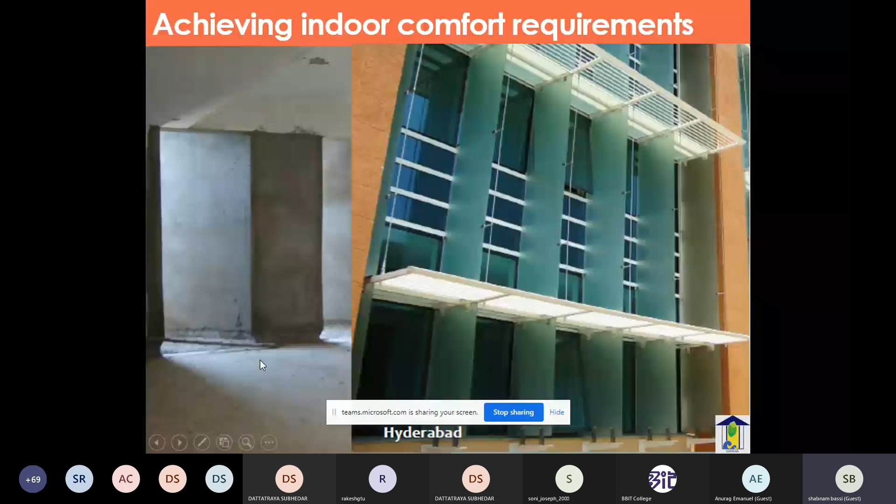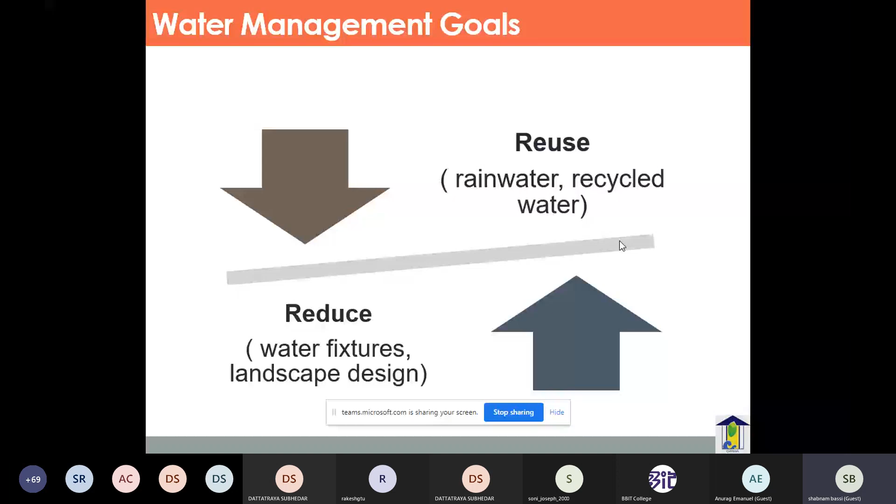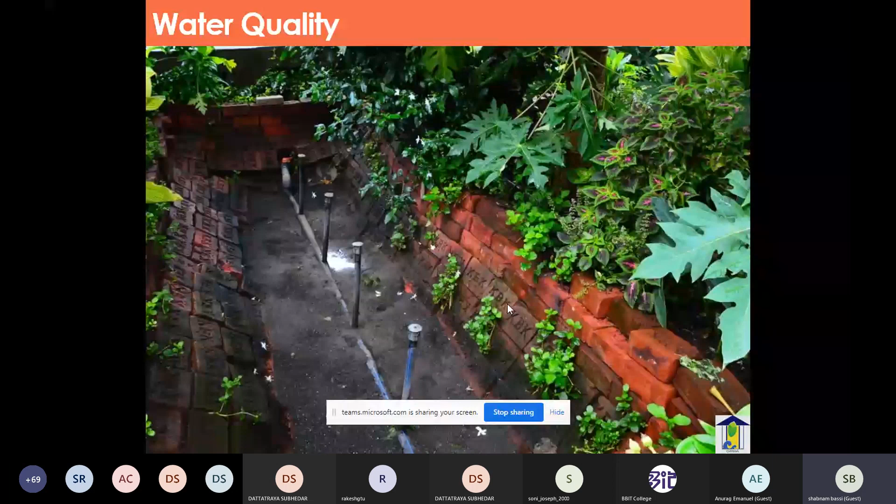So this is what I was just saying, that greenery doesn't mean that we start putting in grass. This is a classic example to show how trees and small bushes and plants can help you not only enhance the greenery in your project, but also maintain the aesthetics of your projects. So this is how we are maintaining the water quality by using water filters, and then rainwater recharging has been done in such a way that the contours are maintained, and if there is rain, these beds will be able to absorb maximum water.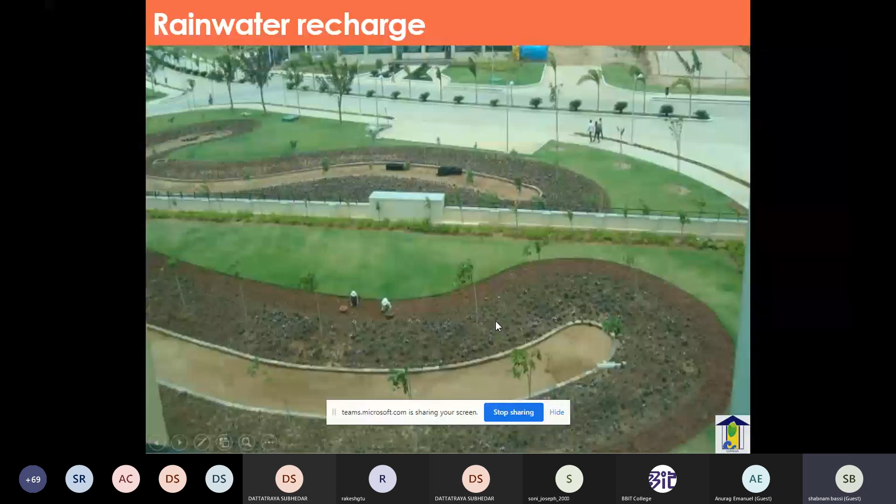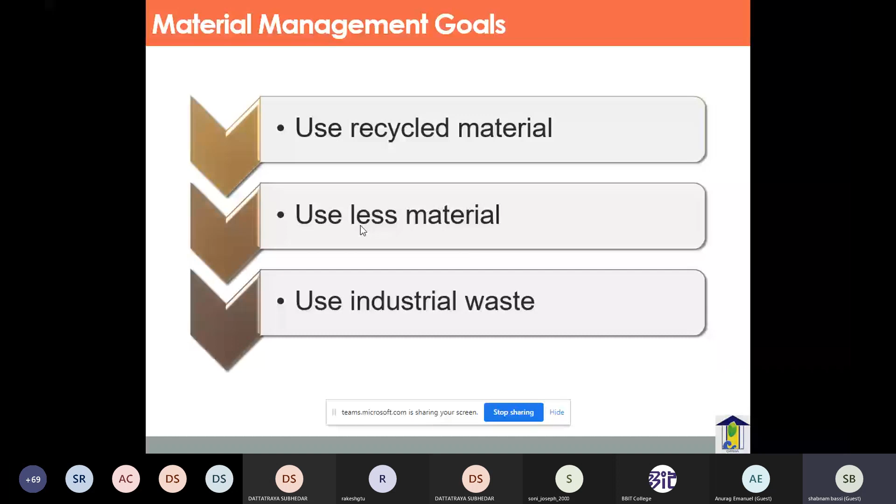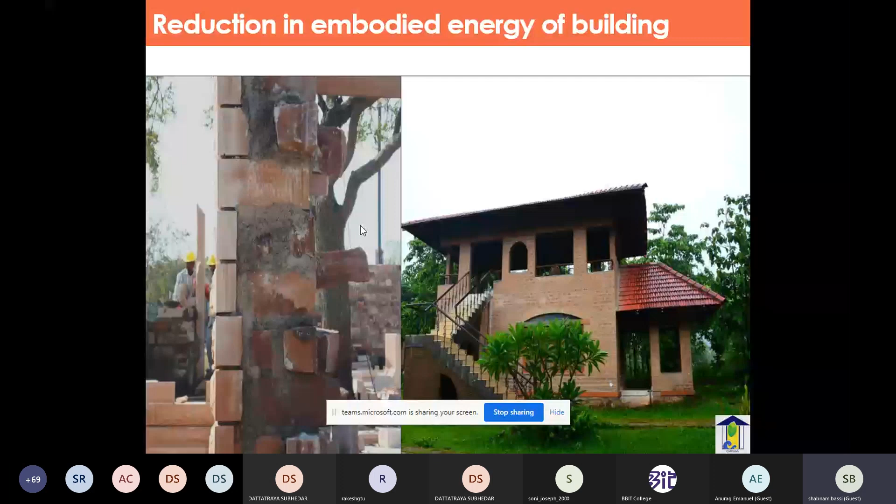So these are a few examples to show how even small projects have been able to reduce wastages in terms of materials in their projects. This is an eco Govardhan village which has used clay bricks. In terms of the bigger projects, these are hollow bricks, and these are large scale constructions in which these projects have implemented these hollow bricks in a successful way.

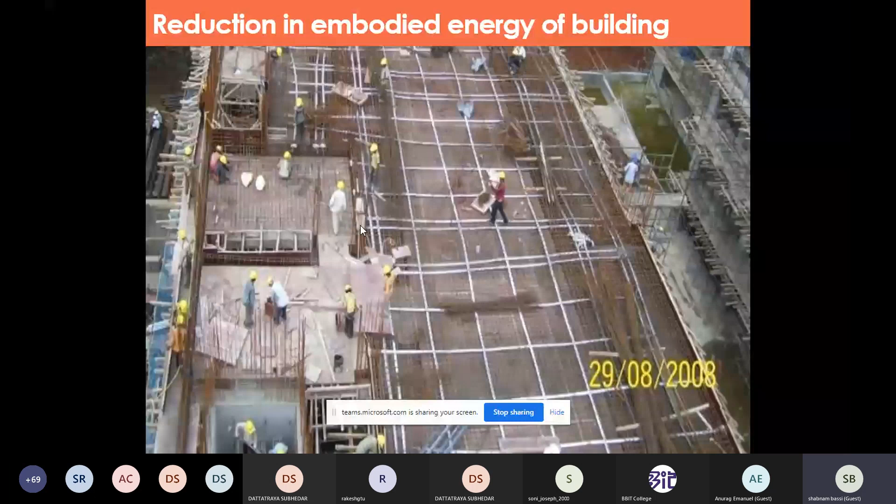Waste management: we need to reuse organic waste to the maximum, segregate waste, and reduce the construction waste. These are the three principles that we want to promote. Avoid post-construction landfills. We shouldn't dump waste outside our project and say that we have successfully done the project. We should have segregation bins installed, even during construction and even after construction, and the waste should then get delivered

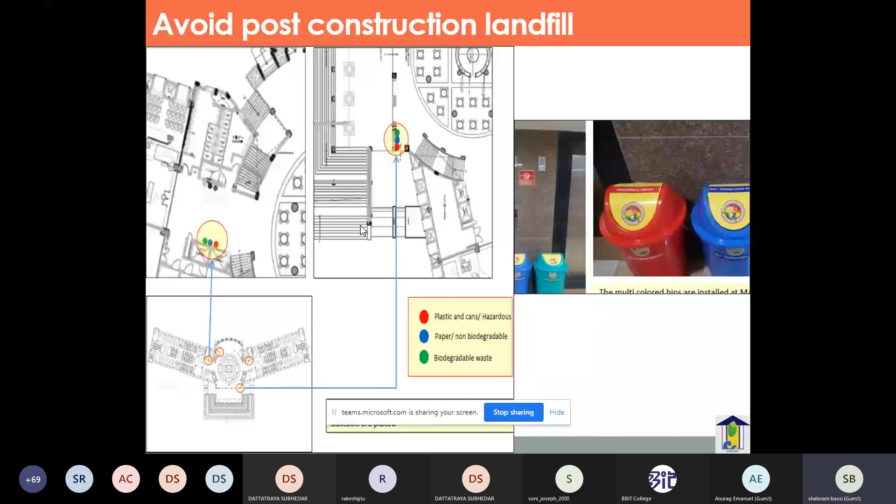Only a very small percentage which is not usable, less than 10% of the entire waste that we are generating, should go into the landfill. There are various ways in which we can do these small little things at our home. For home composting, we have small instruments like khamba, leave-it pot, and prithvi khamba, which help to convert organic waste to manure. And for larger projects, we have bigger systems available to convert it into manure.

So we just talked about labor safety and sanitation. This is one aspect which only GRIHA takes into account; no one cares about how labor is being taken care of on the site. And this is a very common sight that we have seen, that they are living in below-standard conditions on the site.

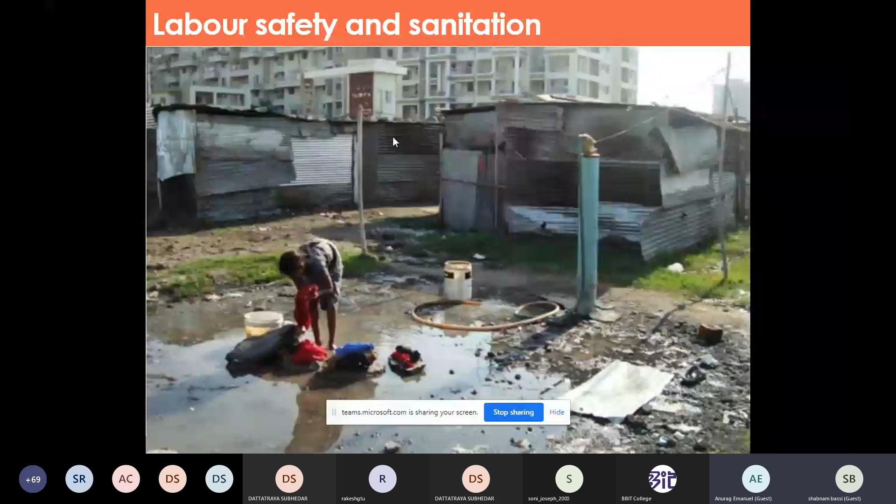Ma'am, sorry to interrupt you. We are running out of time, ma'am. If you can just wind up in another 2 minutes. And ma'am, we have 3 to 4 questions, so we can take them. Sure. Okay.

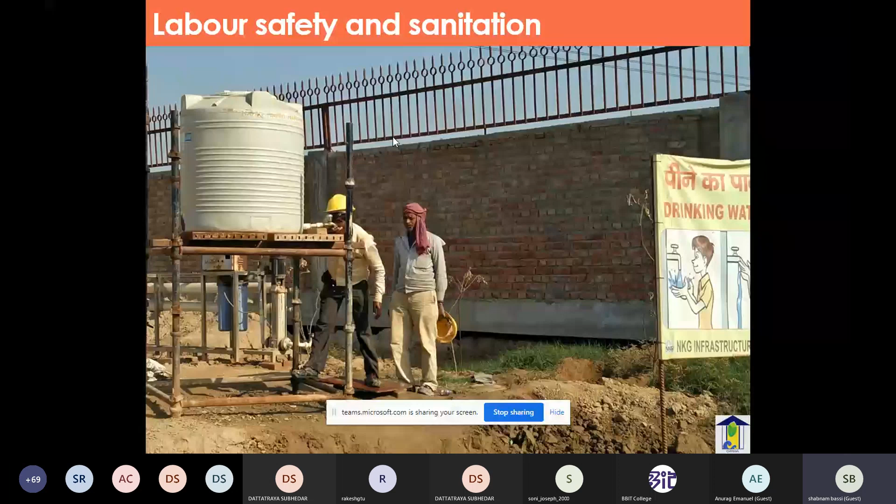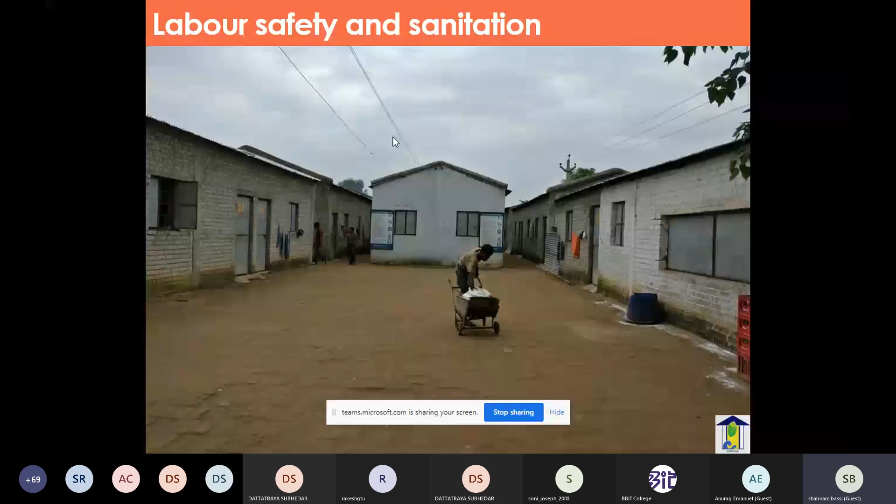So just a few pictures and I'll wind up. We can do a lot for even the people who are working on the site. We can have good water facilitation. These are visuals from our own site, where guards and maintenance people are given good, proper houses to live in. They have got proper rooms to stay in, and there are a lot of awareness campaigns that can be created to generate more awareness for the end user.

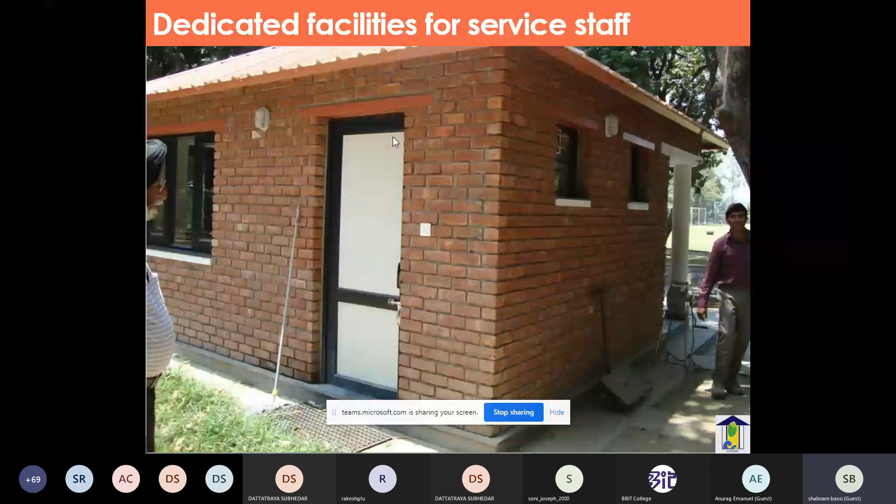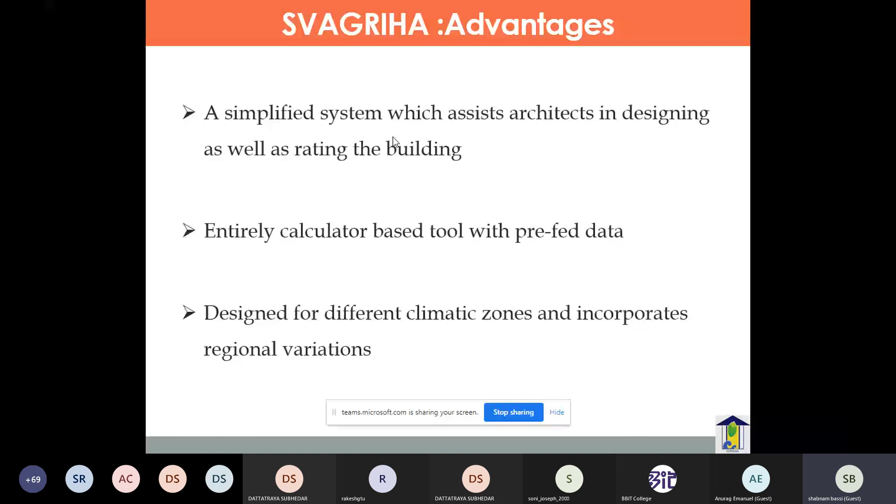I will not go into details of my other ratings, but I will leave these presentations with you to understand the other ratings that are available with us. The GRIHA ratings for small houses can be used by people on their own. They need not go to architects and builders. You can do your calculations and calculate the energy consumption and how green you are for yourself. And these are snapshots of the tool, and pictures of a few GRIHA projects, small houses that have got ratings from us.

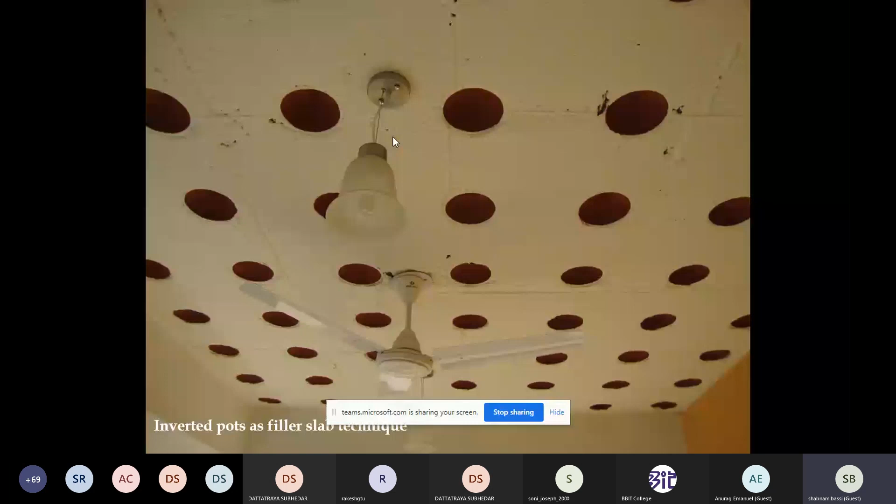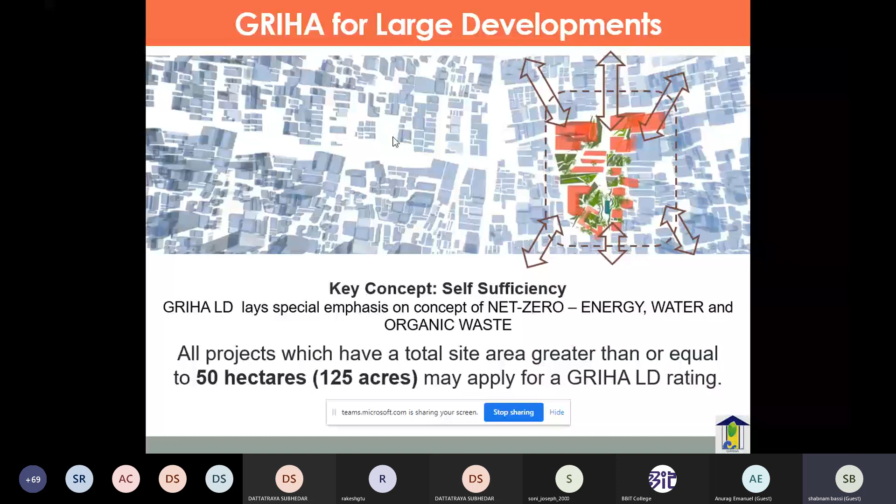And some technologies available, reuse of materials; some waste was used to make some doors. Large developments are basically there to design larger features like STPs or HVACs, so that if you are doing the planning at the right time, the wastages are very less. Various sections of large development categories, not going into details, but definitely you should check our website. This is a website for green ratings, and we'll explore more on what we can do.

The product catalog I just mentioned, you can get access to the materials that you can use in your project. You can get more understanding. And that is all. Thank you so much. And yes, I'm ready to take a few questions now.

Please go ahead. Yeah, thank you, ma'am. Ma'am, there are a few questions from Amit sir. One question is, what are the major challenges in green building construction in India?

Well, a few of the challenges I just mentioned. I think we should look at the biggest challenge from various aspects. From a green building expert aspect, I feel that the greatest challenge is that a developer doesn't want to do the real work of green. They just want to tick a box, and they want to just say that we have done a green project, but no one really cares whether it has really been implemented on site. As a rating body, we really get pushback from these developers because they are always harsh with us that GRIHA requires a lot of compliances.

You keep coming to our site, and why do you keep checking on us? But what we feel is, if we don't keep our checks and balances, these green features will never be met, and the end user will never be able to achieve those, or will never get the benefits he's looking at. So this is the biggest challenge that we see, that to push or motivate them is not easy.